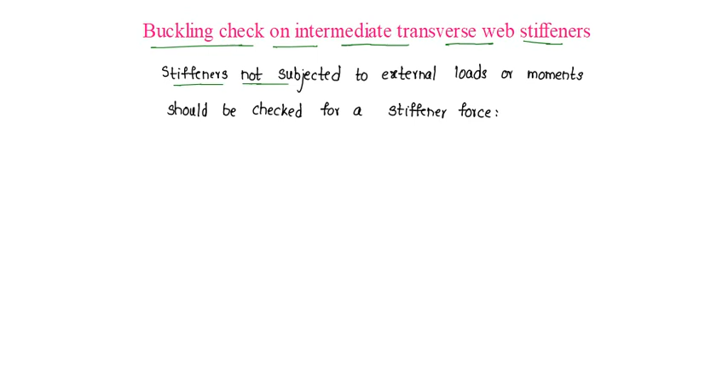Buckling check on intermediate transverse web stiffeners. Stiffeners not subjected to external loads or moments should be checked for a stiffener force denoted by Fq, which is equal to V minus Vcr by gamma m0, which should be less than or equal to Fqd, where V is

factored shear force adjacent to the stiffener, and Vcr is shear buckling resistance, shear buckling resistance of the web panel

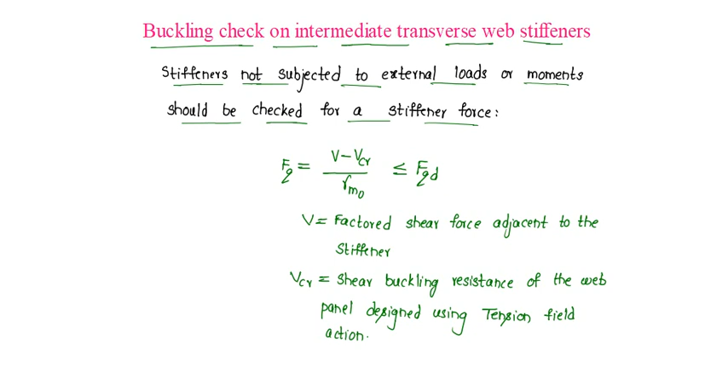designed using tension field action, and gamma m0 is equal to 1.1, whereas stiffeners subject to external loads and moments should meet the conditions for the load carrying web stiffeners.

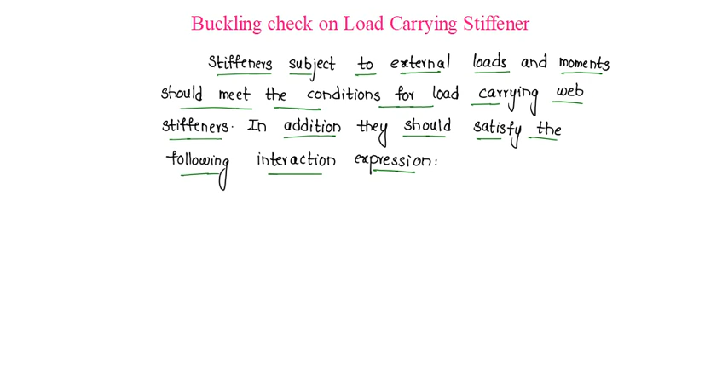In addition, they should satisfy the following interaction expression given as (Fq minus Fx) by Fqd plus Fx by Fxd plus Mq by Myq should be less than or equal to 1, and in this expression if Fq is less than Fx, then this Fq minus Fx will become negative, but it should be taken as 0,

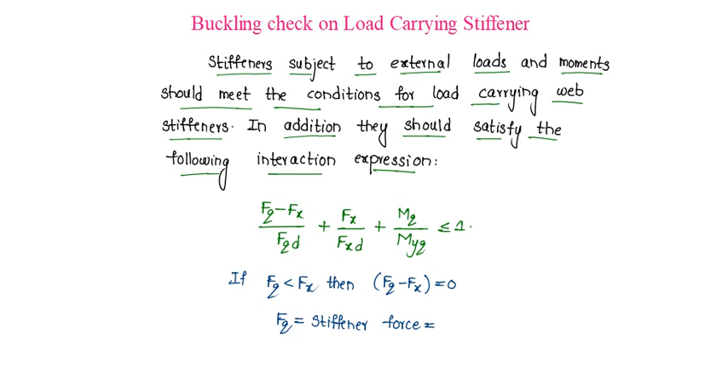where Fq is stiffener force given by the previous expression, which is given as V minus Vcr by gamma m0, whereas Fqd is design resistance of an intermediate web stiffener corresponding to buckling about an axis parallel to the web, and Fx is external load.

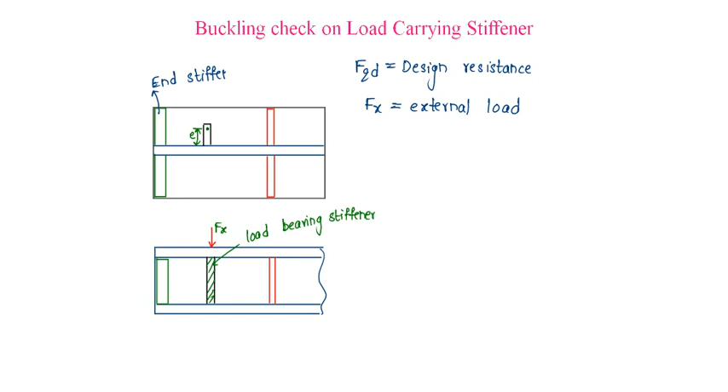Let us say external load this as Fx, then this will be our load bearing stiffener, and on the load bearing stiffener, if the load is acting at an eccentricity say e, this is the plan view, and this is end stiffener, and this is an intermediate stiffener,

so Fx is the external load and Fxd is design resistance of a load carrying stiffener. This is design resistance of a web stiffener or intermediate stiffener,

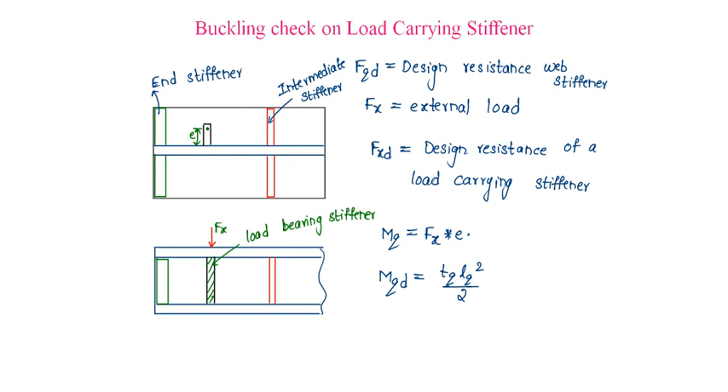whereas Mq is moment on the stiffener due to eccentric loading applied, so that is Fx into e. e is our eccentricity and Fx is our external load, and Myq is yield moment capacity of the stiffener based on its elastic modulus about its centroidal axis parallel to the web, which is given as tq into Lq square by 2 into fy by gamma m0.

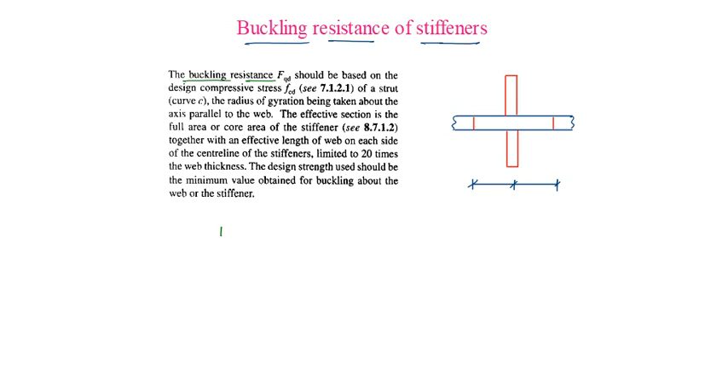Buckling resistance of stiffeners, that is the buckling resistance Fqd, should be based on the design compressive strength fcd of a strut using curve C. The buckling resistance Fqd is given as effective area into fcd, where the effective section is the full area or core area of the stiffener together with an effective length of web on each side of the center line of the stiffener limited to 20 times the web thickness.

That is, this area of the stiffener, that is our outstand bs, should not be more than 20 tq epsilon, and for core section it is taken as 14 tq epsilon, and this is thickness of our stiffener. Beyond that, the projection is taken as 20 times the thickness of the web from the center line of the stiffener on both sides. This is our effective area, and the design strength used should be minimum value obtained for buckling about the web or the stiffener.

In this, fcd is given as fy by gamma m0 by phi plus under root of phi square minus lambda square, where phi is given as 0.5 times of 1 plus alpha into lambda minus 0.2 plus lambda square, where alpha for curve C is taken as 0.49 and lambda is non-dimensional slenderness ratio, which is given as under root of fy by fcc, where fcc is equal to pi square E by (KL by r) whole square,

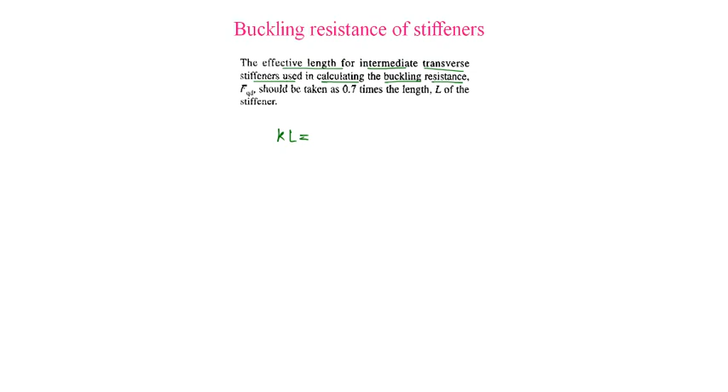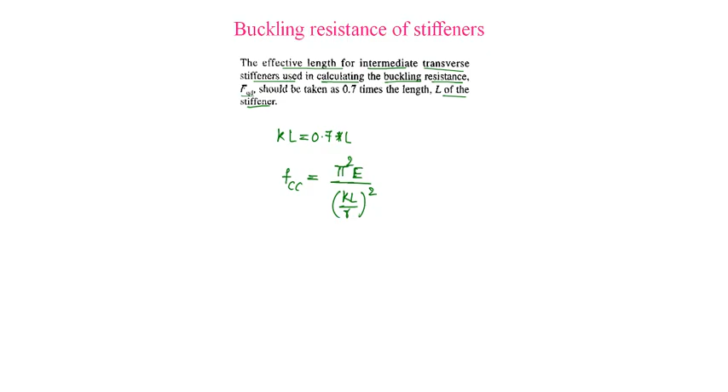where KL is the effective length, and the effective length for intermediate transverse stiffener used in calculation of the buckling resistance Fqd shall be taken as 0.7 times L, where L is length of the stiffener. Based on this KL by r, we can find fcc, that is pi square E by (KL by r) whole square. Using that we can find fcd, and substituting we can find Fqd,

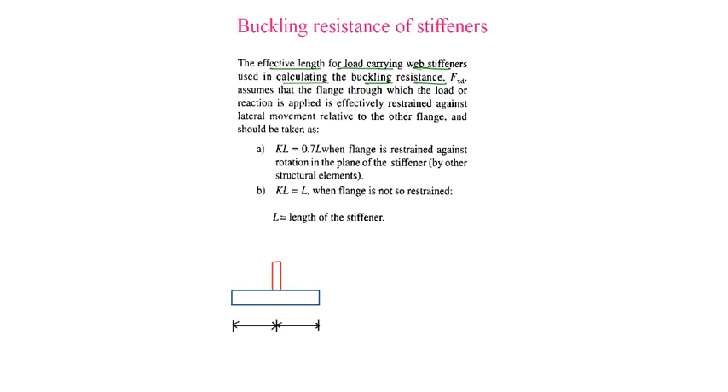whereas the effective length for load carrying web stiffeners used in calculating the buckling resistance Fxd, where Fxd is design resistance of load bearing stiffener, in which also the effective area is taken as area of the stiffener, say length of the stiffener as Lq and thickness of the stiffener as tq, and for the core area or effective area calculation, web 20 times tw

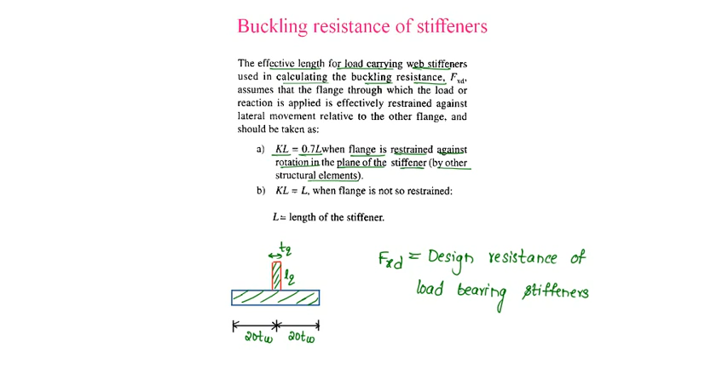is taken on both sides, and in this case the effective length KL is equal to 0.7 times L when flange is restrained against rotation in the plane of the stiffener by other structural elements, whereas KL equal to L when flange is not restrained, where L is length of the stiffener.